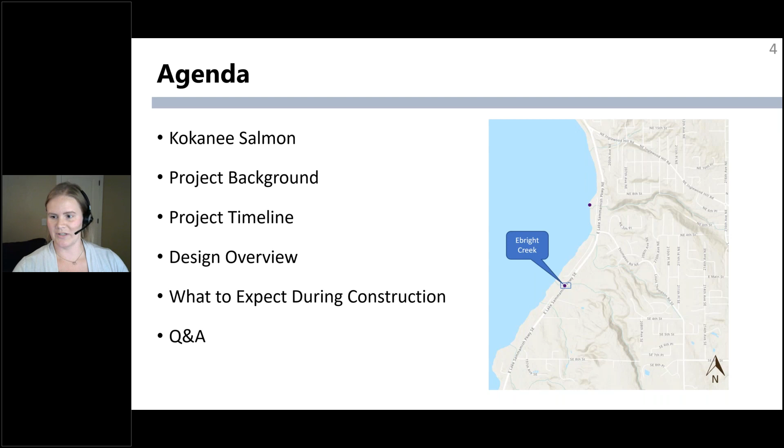So why is Ebright Creek so important? Well, Ebright Creek is one of the few primary spawning tributaries for kokanee and has good characteristics for kokanee spawning, like nice gravel and a shallow slope. Over the years, the city has been working with the Lake Sammamish Kokanee Work Group, Trout Unlimited, Mid-Sound Fisheries, and King County to learn more about kokanee and help increase their population.

Through our time together, we've learned that the kokanee have a three-year life cycle. Kokanee fry come to life in the creeks, then migrate downstream to Lake Sammamish. They spend three summers living and feeding in the lake, then finally return to spawn in the creek, and the next generation begins. This life cycle is why removing barriers between Lake Sammamish and the upstream habitat is so important. We believe this will give the kokanee the opportunity to thrive once again.

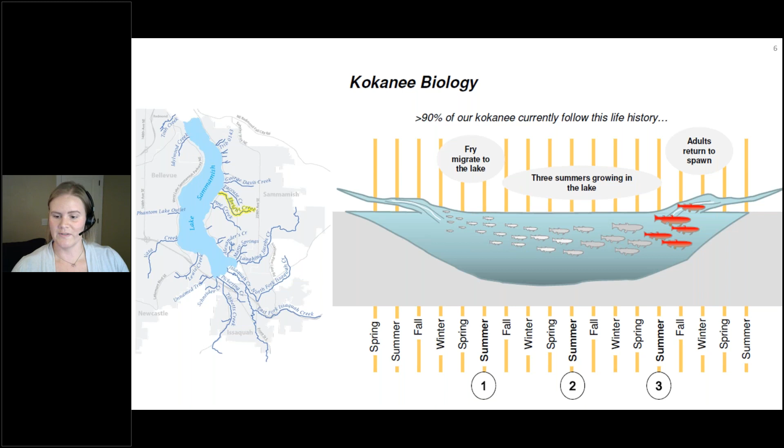The circles on this slide depict the timeline of how the project was identified and incorporated into the city's work plan. Back in 2014, the Lake Sammamish Kokanee Work Group produced the Kokanee Blueprint, which identified Ebright Creek Fish Passage Barrier and others for removal as priority improvements. In 2016, the City Council adopted the Storm and Surface Water Comprehensive Plan, which included fish passage and kokanee restoration as priority action items. Following that plan, the city completed the Zackuse Creek Fish Passage project in 2018, and soon after initiated the Ebright Creek Fish Passage project. You may be aware we're also pursuing the George Davis Creek Fish Passage project, just north of Ebright Creek.

A little further north than Zackuse. So these photos show what the roads and culverts look like now. The star on the slide depicts the inlet side. The creek runs under East Lake Sammamish Parkway from east to west toward Lake Sammamish. The existing culverts are considered a partial fish passage barrier. It's hard when you're not actually there to describe how the creek goes under the road, but above and below the road surface, you'll also notice utilities like water, sewer, gas, and electric, which we need to work with during construction.

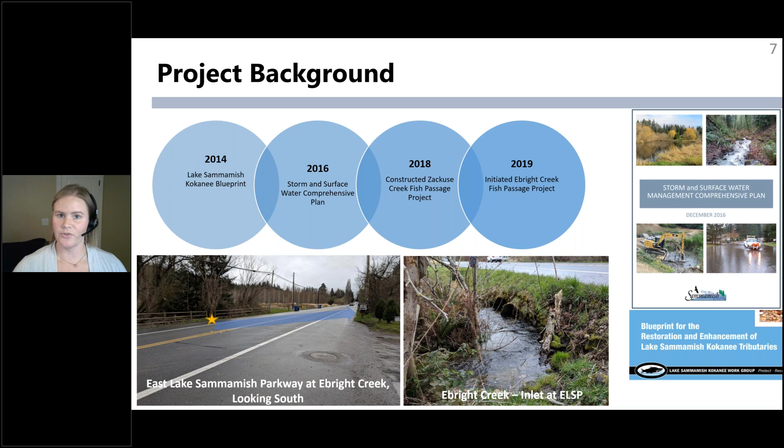So overall, our goal is to remove the existing culverts on Ebright Creek and replace them with a fish passable box culvert. You'll see a photo later in the presentation that depicts what that might look like. In addition, our project will enhance the stream and riparian habitat by adding woody debris, habitat boulders, and native plantings. We are working to minimize impacts to neighbors and the environment and provide a long-term solution for fish passage.

To achieve this, our consultant has followed best practices, design guidelines, and used stakeholder input, like coordinating with the Washington Department of Fish and Wildlife and the Muckleshoot Indian Tribe, just to name a few.

I will also note that King County is continuing their work on the trail project, the East Lake Sammamish Regional Trail, and they are planning to remove their fish passage barrier just downstream of our project in 2022. This is somewhat different than the Zackuse Creek project, if you're familiar, where the trail and the parkway were under construction at the same time.

Now I will let Laura Rupert, our consultant project manager, talk more about the project timing, design details, and what you could expect during construction.

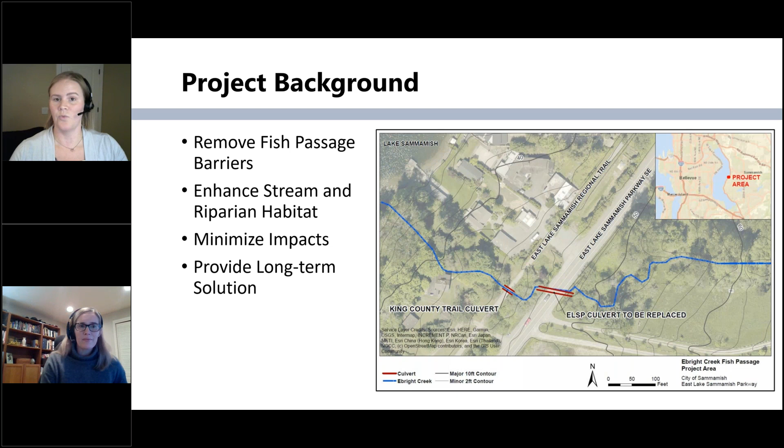Starting with the timeline, we kicked this project off end of 2019, and we're currently close to wrapping up the design phase. We have finished our 90% design, and we're almost at 100% complete. We have our in-water work permits, and we're still in negotiations and coordination with King County to get some access permits, and then we'll be all set.

Our 100% design should be done end of January so that we can be ready to go out to bid in the spring. Today we're doing this public meeting, and it may seem late in design. We did coordination with the adjacent property owners earlier during design, and we focused this greater community outreach now so that we can really prep you for what to expect during construction.

I mentioned we will plan on advertising the project in the springtime, and construction will happen in the summer, and the in-water work window is July through September. So we should have everything wrapped up and ready to go before the fall winter kokanee run.

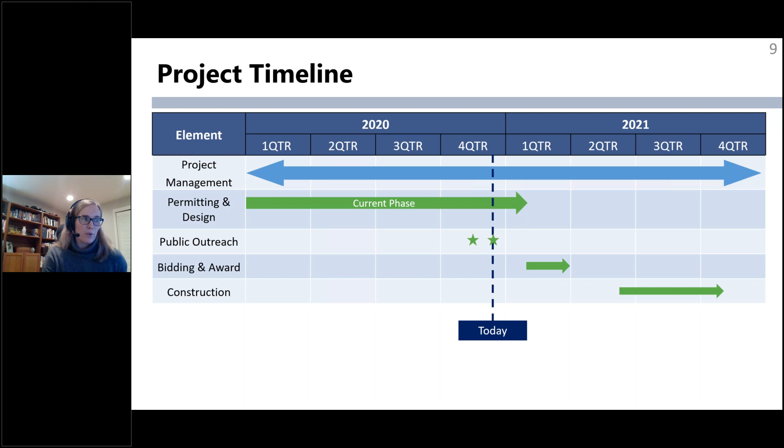On the design side, it's kind of a busy slide, but we can step through a number of design elements as the prompts come up. First in red, this is where the existing culverts are, which will be completely removed. Then in green, this is the new culvert. It's 14 feet wide, 9 feet high - those are the inside dimensions. It's a precast concrete box culvert.

Upstream of the culvert, we are doing some channel realignments to tie the channel into the new culvert with a more natural alignment, using wood to provide both habitat and bank protection. We carefully designed this to meet and be similar to the upstream and downstream project, and worked with King County to make sure we tie in well with them.

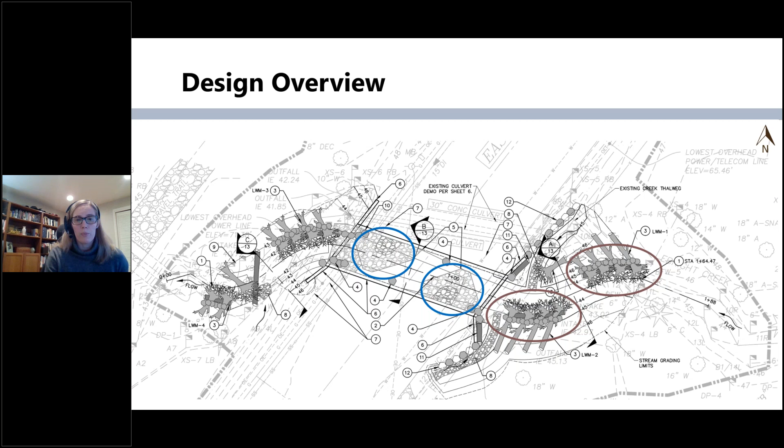Through the culvert, we have meander bars, which are a coarser material that will help maintain some channel sinuosity and diversity through the culvert. As we move outside of the culvert, we have more large woody debris for both bank protection and habitat, transitioning to the King County project. Yes, those are the main elements there. We've had good coordination with King County, which has been great, sharing design files and everything, so we're confident in how those two channels will come together.

And sediment is another piece I'll mention. In addition to the more quantitative analysis, we also included a geomorphologist on the team to walk the site and do a qualitative assessment to make sure that we're really taking into account and designing a system that will be able to transport similarly to the upstream and downstream reaches.

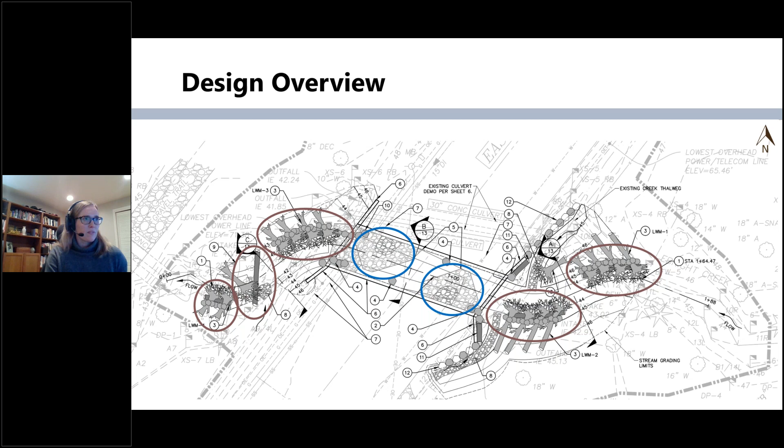All right, for construction sequencing, there will be some initial site prep and erosion control to protect the channel during the work time. There will be the stream bypass installed, and some initial utility relocations. A lot of this can be done with a partial road closure - I'll get more specific to the road closures in a couple slides. We'll do a full closure for the culvert installation, and then the road can be reopened up for finished grading, planting, and things like that.

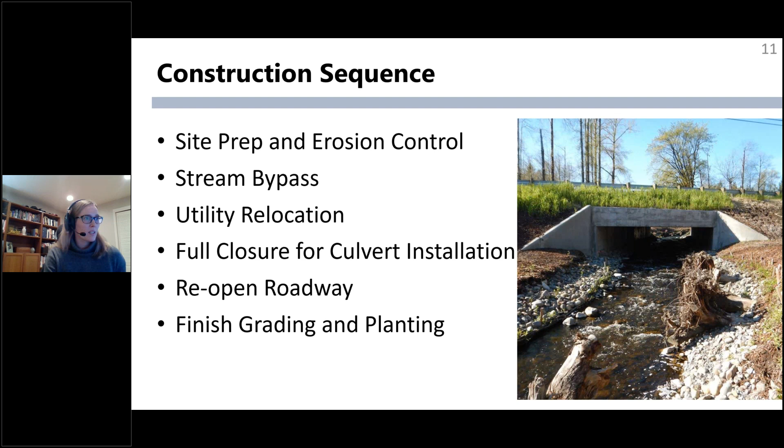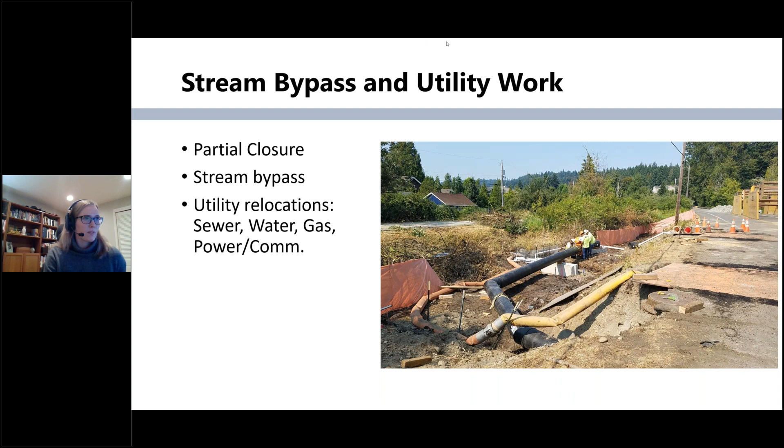The full closure will happen when the culvert is installed. It's going to be a big, deep excavation. The culvert's inside dimensions are 9 feet, and when you account for the culvert thickness and base materials, you're looking at a hole that's over 14 feet deep.

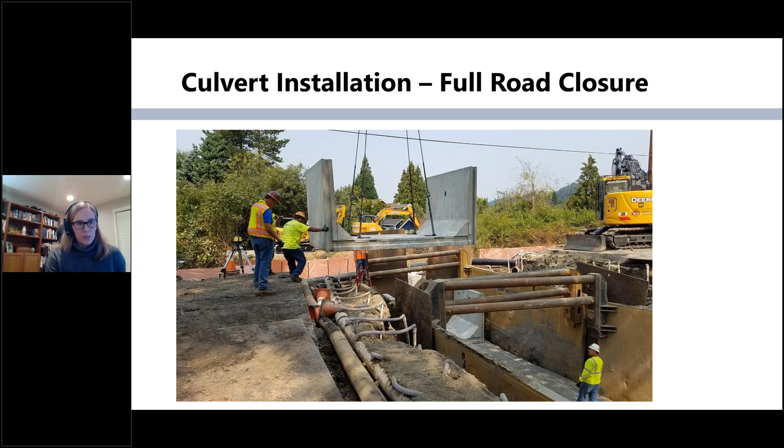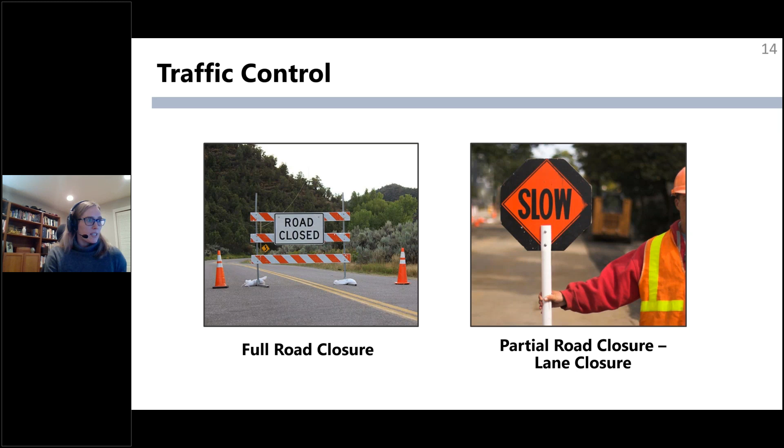The traffic control I was talking about includes both full road closure and partial lane closures. The full road closure was approved by council a couple weeks ago—there's a link at the end of the presentation if you're curious to watch more about that council meeting. For the duration of the culvert construction, the full road closure is up to 3 weeks, so hopefully that should be more than enough time.

We mentioned the George Davis closure also because there's a chance the two projects could occur during the same summer, with similar in-water work windows. So both closures could happen at the same time, and that possibility is considered in the detour routes that Stephanie will talk about a little later.

For the partial road closure, this would be as-needed intermittent single lane closures. We considered whether to just do partial road closure for the whole project, but in addition to the width constriction, the full closure really cuts the construction duration overall, so it felt like the faster way to have less impact overall.

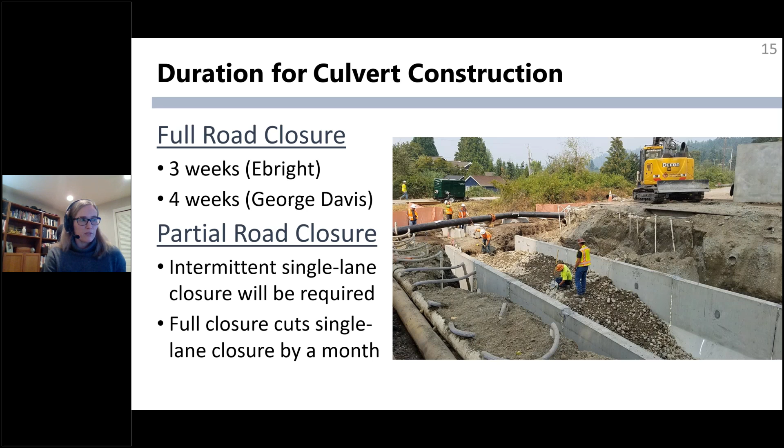And with that, I will go back to Stephanie to talk about the detour routes.

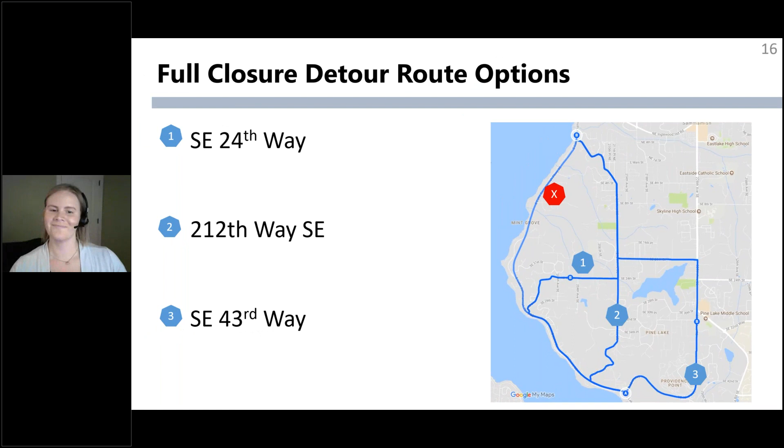Thanks, Laura. So these are a few options of the detour routes that would be or could be used during the full closure. They're the same as were used for the Zackuse Creek project, and the contractor will put together a plan that the city would ultimately review and approve. We're interested in your thoughts and comments on that, so if you have any input, feel free to put it in the chat and we'll take it into consideration.

As Laura mentioned, the George Davis Creek project is possibly going to be constructed at the same time, so the George Davis Creek detours would also accommodate Ebright Creek, in that you'd end up driving 228 to Inglewood. Anyone in between—north of Ebright Creek or south of George Davis Creek—would end up being detoured up Louis Thompson Road. That's how that would work.

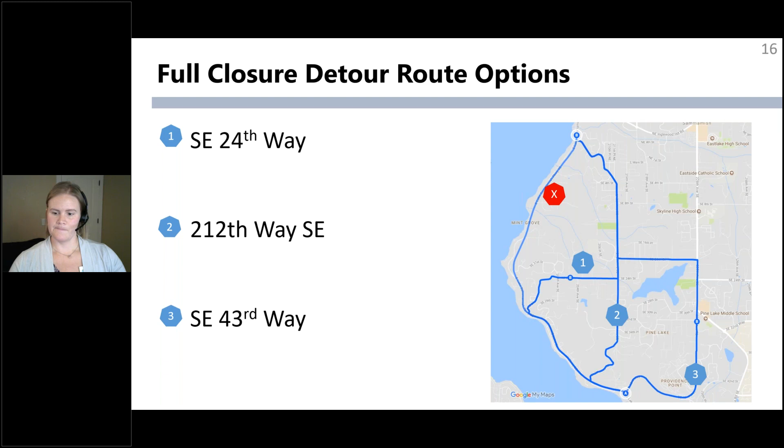Lastly, I'd like to recognize the contributions of the groups and individuals involved in helping make this project happen: the Sammamish City Council for their dedication and support to improving fish passage in the city; the Brian Abbott Fish Barrier Removal Board and the King County Flood Control District for their financial contributions; the Kokanee Work Group for their stewardship in improving the health of the native Lake Sammamish Kokanee population; and finally our partners, including the Washington Department of Fish and Wildlife, Recreation and Conservation Office, King County, their consultant Parametrix, Sammamish Plateau Water, and many others.